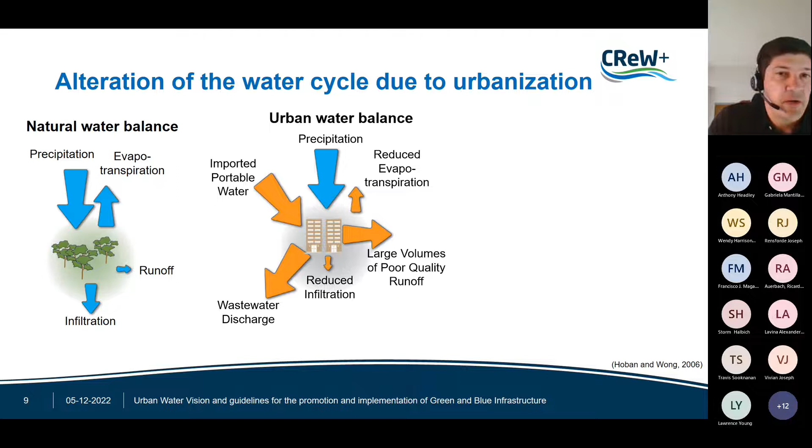The soil sealing leads to reduced infiltration, but at the same time, due to all these changes, we will have a generation of wastewater. So we have wastewater discharge. In many cases, it's still untreated wastewater that enters the environment, or we need to treat it to protect the environment. And we also produce large volumes of surface runoff. When it rains and the surface is sealed, there's no way for the water to infiltrate. It's not retained by plants or water bodies. So we have a problem of large runoff volumes, which often leads to inundation, flooding problems.

Now, the intention of green infrastructure, and this is now the water flow of a water-sensitive city when green infrastructure is implemented, is to come back to water flows at a magnitude of more or less a natural water balance. Of course, we still have artificial water flows, like we still need to import water to cities for different uses. But the idea is to introduce more vegetation, to improve infiltration, to increase evapotranspiration again, but also to look for techniques to reuse wastewater and stormwater so that the runoff and wastewater discharge can be reduced. Interestingly, these changes, the increase of evapotranspiration, are also solving problems like climate regulation in cities.

So with an increased evapotranspiration, we also have a cooling effect for the city that has been lost due to the loss of vegetation. And also biodiversity goals can be introduced. So the water sensitive city has benefits for the water cycle, but it also has additional benefits. They can be ecological benefits related to biodiversity, to safeguard remaining existing ecosystems or those that are impacted by urbanization.

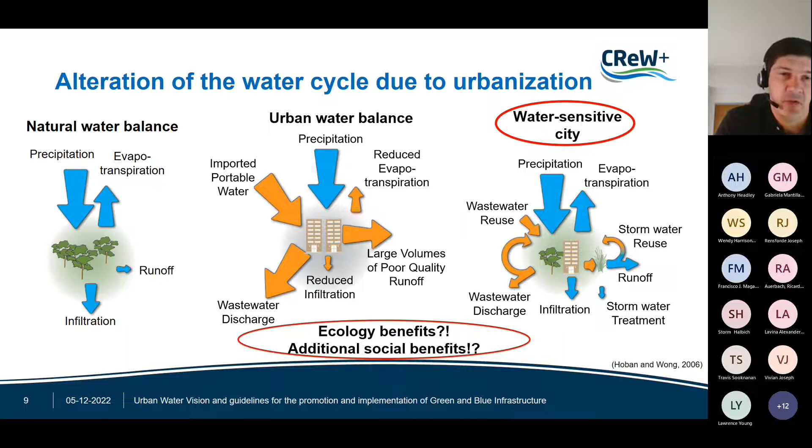But it can also have several additional social benefits. And that's what green infrastructure is actually about. It's not just about improving the water cycle, it's also intended to improve ecological functions and to add social benefits.

So thinking of a water sensitive city that has green infrastructure is meant, as shown in the slide before, to reproduce somehow a natural hydrological cycle, to mitigate the problems of urban runoff in quantity and also the quality problems of urban runoff, to minimize the impact of urban development, but also to maximize the landscape integration and to maximize social and environmental values. So these are the added values of green infrastructure when we design cities in a more water sensitive way.

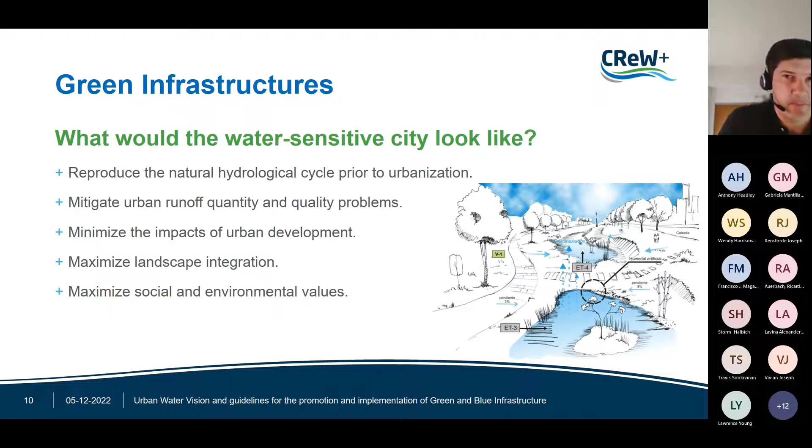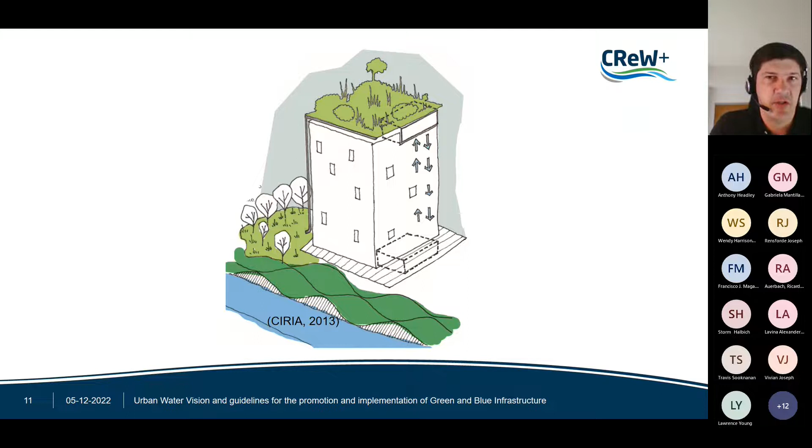Now, the implementation of green infrastructure can take place at different scales. It can start at a building scale, or the building and the surroundings of the building, like is shown here in this image. And we can think of elements like a green roof that is retaining precipitation, so it retains rainwater. It allows vegetation to grow, and it can regulate the temperature of the environment surrounding the building, but also of the building itself. So it can be of benefit to the residents of the building and can bear also biodiversity benefits.

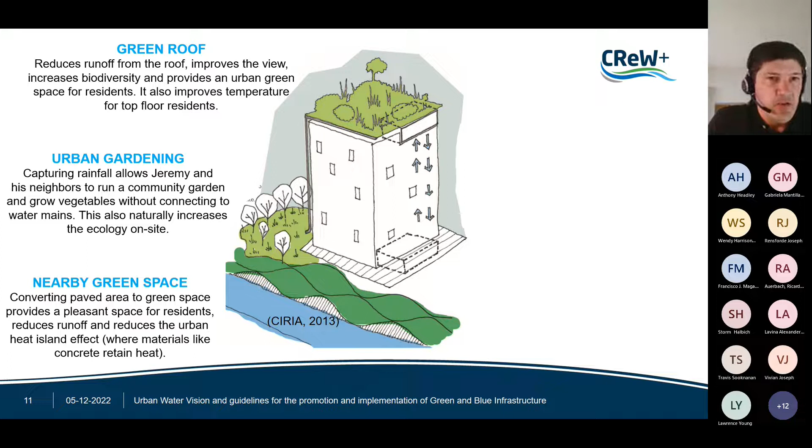There's also a possibility to have urban gardening, could be even on the roof, in a green roof, but often also surroundings of buildings or spaces considered during the planning phase can serve for urban gardening and to produce food and support the food supply of residents. Also other spaces in the surrounding of buildings, when you think of areas for transit of people or just to recreate, can be designed in an environmentally friendly way as green spaces and not necessarily need to be paved always. So this can also have social and ecological benefits.

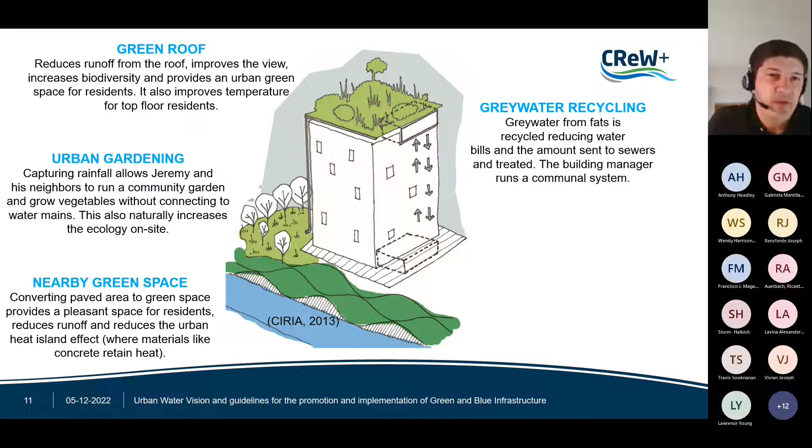Within the building and the building surroundings, water that is used can also be reused and recycled. Specifically, gray water is the easiest used water to recycle. Gray water refers to the water that comes from the kitchen sinks, from showers, from the washing machine, and that can be treated with low technology requirements and can be reused inside the building or for watering an urban garden or recreational green spaces.

And also thinking of the building and where it's located, here you can see a building that is next to a river. It can be, and this is the idea of landscape integration, integrated in the dynamics of a natural landscape. If there's the river and, for example, flooding is an issue, there's also a means, and this may be more advanced and sophisticated, to integrate or adapt buildings or spaces around the building to be flooded at certain times without causing damage. So by design, allow dynamics of natural environments in the surroundings.

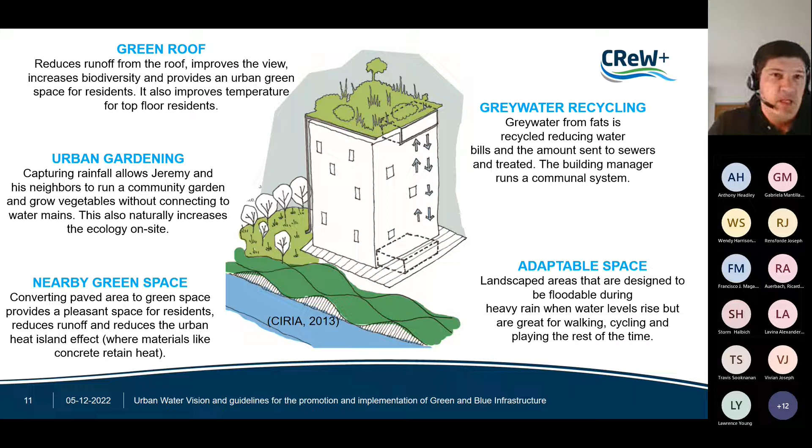So that's a quite useful web page that you can find when you look for green infrastructure EPA. You will definitely find it. It has a lot of information, also cost-benefit analysis and guidelines. It's for the United States context, but I believe it's quite useful also for your context. So these are some examples.

Now here again comes a short question for you: what kind of examples of green infrastructure do you know of in your area of work? Do you have experiences with green infrastructure? What kind of green infrastructures have been implemented in your working context that you know of? So it's not about having heard that green roofs exist, but really what examples have been implemented in your area of work that you know of. So again, you can type in your answers.

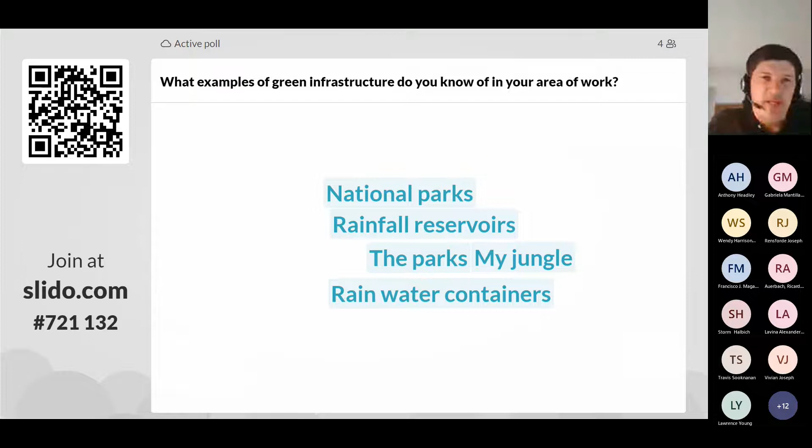Parks, national parks, yes. I have not, and on purpose, I did not give a definition yet for green infrastructure, so you're not influenced by any provided definition, but you already mentioned some important elements when you mention national parks or the jungle. That means, I assume, green spaces, green elements, which have maybe not been developed in the first place as a green infrastructure, but which form part of a green infrastructure.

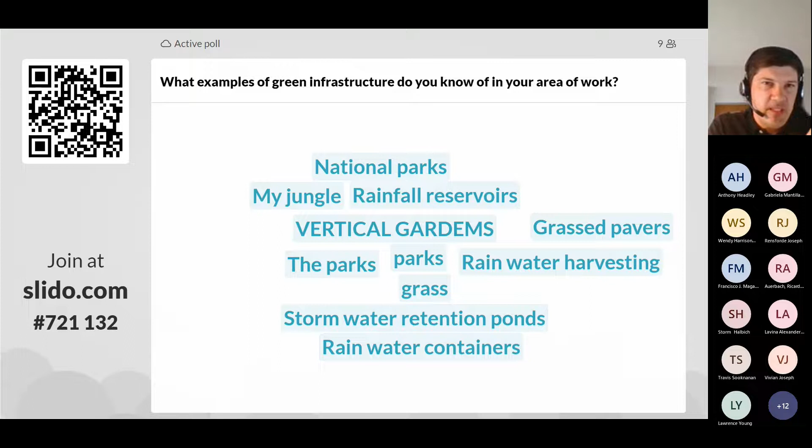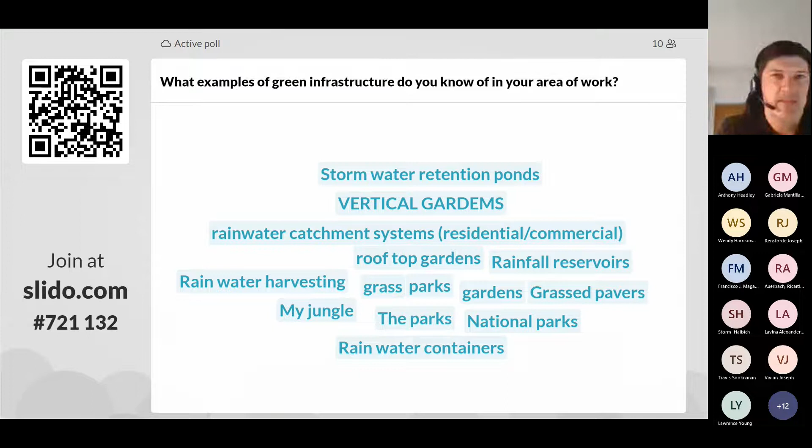So important elements. Grass pavers, yes. Rainwater harvesting. Yeah. So those are similar: the rainfall reservoirs, rainwater harvesting, stormwater retention ponds. So maybe different sizes, household level or building level rainwater harvesting. Stormwater retention ponds are often collecting surface runoff from a larger area. Vertical gardens, yeah, like living walls, green walls. Permeable pavers, yes.

Hello, good morning. Yes. Yep, yes. Sorry, let me turn off the speaker. Okay, was there something that you wanted to mention? You're also allowed to speak up. You're not that many people that it will end up in a mess, so you're free to talk as well.

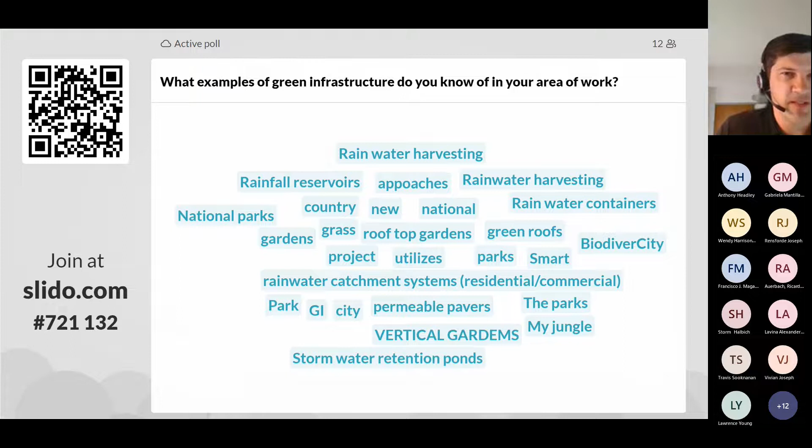Okay, rooftop gardens, like urban farming, I understand. Great. Good. Yes, thank you. That's quite a lot. I'm really encouraged to see so many green infrastructures that you know from your working context. That's great. Okay, let's continue.

Now here is a definition. That's one definition; there are several definitions. This is, I would say, more a European definition. I've shown the webpage of the EPA in the United States. In the United States, green infrastructure is very much related to stormwater management issues. That's maybe the most important connection of green infrastructure. In Europe, in other parts of the world, green infrastructure is often thought

beyond stormwater management. So here's a definition from the Ecologic Institute, based in Germany, that defines green infrastructure as a network of natural and semi-natural areas, features and green spaces in rural and urban, terrestrial, freshwater, coastal and marine areas. So first, it is a network. That's very important. Then it is composed of natural and semi-natural areas and green spaces, both in urban and rural areas, and of any kind of ecosystem, be it terrestrial, freshwater, coastal, marine areas; all can form part of a green infrastructure.

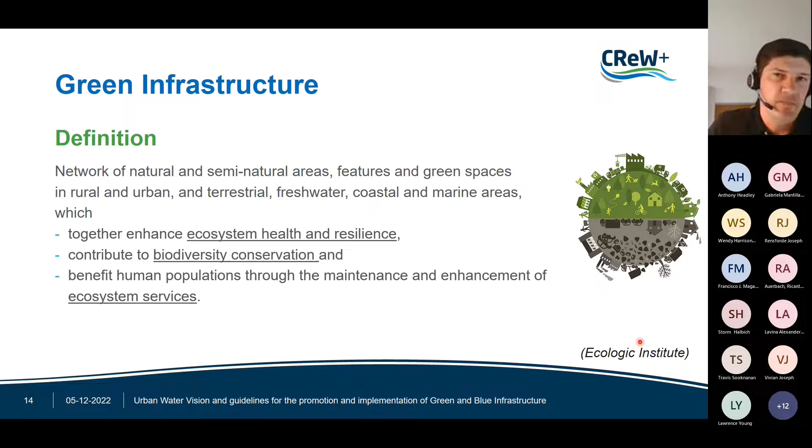That, of course, is difficult to achieve in an urban context, because in an urban context we heavily modify the landscape, and ecosystem health, resilience and biodiversity protection are not the main objectives of building a city. But still, green infrastructure has become an important concept in the urban context as well. And the second part of the definition is more about how it should be achieved, and that's through strengthening a strategic and coordinated approach: an initiative that focuses on maintaining, restoring, improving, connecting existing areas and features, as well as creating new areas and features.

So we should think of the green infrastructure in urban areas really as the network, the same idea of networked natural and semi-natural areas, what is already there. Hopefully in a given city we have green spaces, and maybe some more natural ones, like an urban forest, or in coastal areas even mangroves. And we also have built green spaces like parks or sidewalk and street greenery. All these elements should be thought of in a strategic and coordinated manner to really create this network, because in the network function, it provides many more services than just an individual tree or a single park.

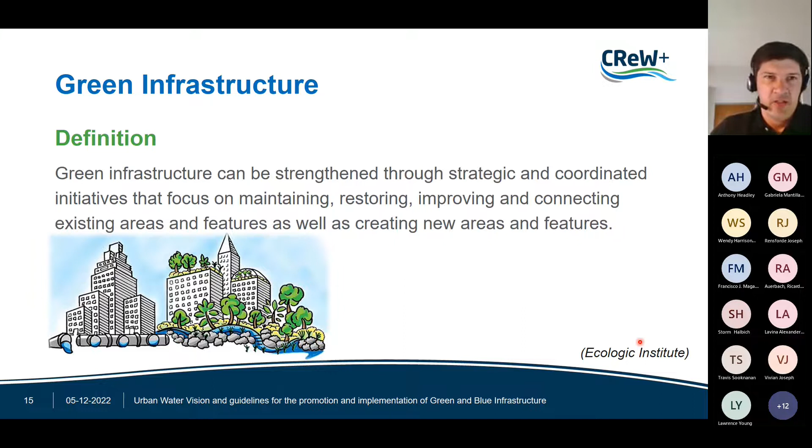So I've shown the image of the green infrastructure at the building scale. Now this is an image that shows green infrastructure thought more at the city, or at least a city sector scale. So you see the different elements of green roofs on some buildings. You see some roadside greenery. You see the river with riparian areas and some green features.

Now, thinking of a larger area allows to think of more functions. So not just functions related to the building itself, the use of water, for example, or use of green space surrounding the building, on top of the building, or at the sides of the building. Here now it's about really thinking at a larger scale. And one important element is to deal with the runoff, to think of how to connect areas, because usually a green roof will not control all the runoff. And also we have a lot of paved areas.

So we need to deal with the topic of capturing runoff wherever it's possible, to reduce the pressure on the drainage infrastructure, and also reduce the flood risk associated. So this is a strategic task, not just thinking of the engineered structure of conveying stormwater, but also think of green infrastructure elements that can help to do this job.

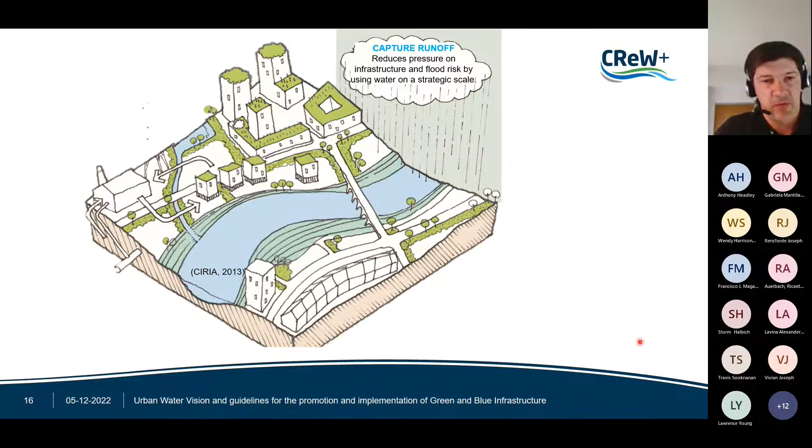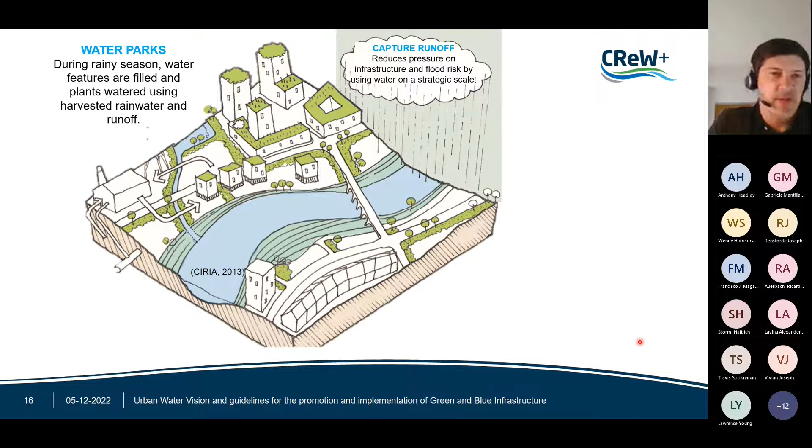This can also be done by creating something like water parks, so water bodies in the city storing water during the rainy season, so that the water can be used in the dry season, to water plants, to be used for different purposes. An often integrated example is to use these water parks also to provide water for fire protection in cities, which is often required, and try to create them as water parks at best with social and ecological functions. So with an ecologically sound design and integrated in social recreational spaces.

Elements like rivers or lakes, water spaces in the city, larger natural areas can also be adapted in the city. So the city can adapt to these spaces. So, like at the building scale, have a more dynamic use of the space, so that flooding of areas can be allowed. At low flow times, areas become areas for recreation, and at high flow times, they're flooded and provide storage space for river runoff.

Also, some areas may be designed, as shown for the example of the building, to be flooded. So that also creates additional storage space to confront flooding issues, and to reuse. So that requires the design of this area for these specific times when they are flooded.

Also, the green grid is an element that connects green spaces, that is really thought of as connectivity to provide ways for wildlife and also for people, like the walkability that I mentioned in cities. And also you can think of routes, because stormwater control is an issue: areas where water is routed when it comes to flooding, so there's excess water, but the areas are designed for this purpose as well.

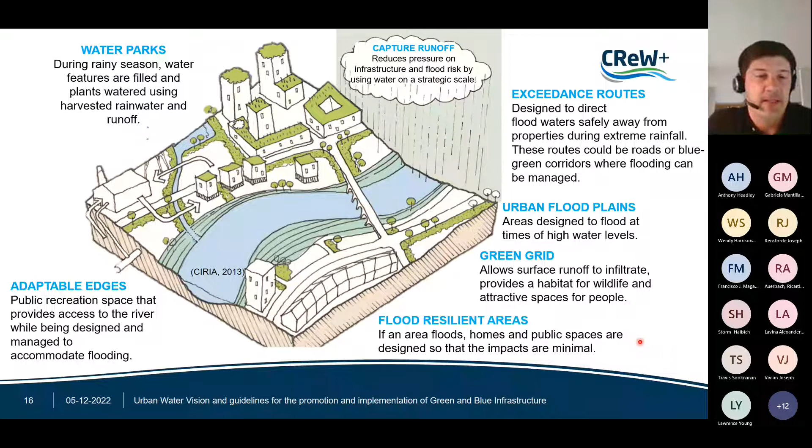Now I have here a few key characteristics of green infrastructure that may have popped up already. One is the importance of a critical mass. This comes from the network character. So there needs to be a critical mass to really achieve the functioning of a green infrastructure, or a certain degree of connectivity. So it means we are not talking about a tree. A tree is not a green infrastructure, but it has to have some kind of connectivity. That's one key characteristic.

The other one is the benefits to people. So this is already in the definition. It has to contribute to the delivery of ecosystem services. And as said in the definition, we are dealing with an ecological function and also a social function. So then by definition, the key characteristic of green infrastructure is multifunctionality. And this is even more true in urban areas. So it has to serve several functions, at least for people and nature, it has to serve a purpose.

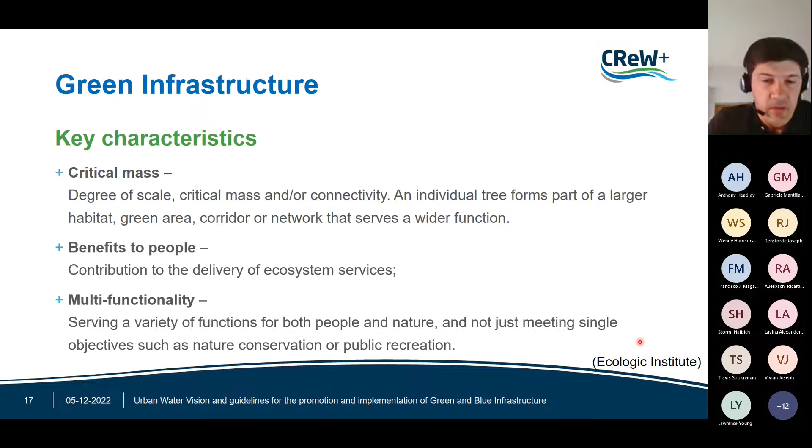So that's then about dealing with infrastructure that is not single objective, but multi-objective, thinking of nature conservation, public recreation, or other social functions at the time. And another interesting characteristic, because it is an idea of a network and strategically planned, coordinated infrastructure citywide, is that it tends to increase green solutions, green areas in an urban area.

It needs to have a substitutability with gray infrastructure. So it should be able to replace functions of man-made or gray infrastructure. For example, to have more nature-based solutions for flood defense, for water treatment, for pollution control, or as recreational infrastructure. So that is also a key characteristic, to think of how solutions can be more nature-based in the end. The coordinated interventions were mentioned in the definition as well. So that's part of the strategic approach.

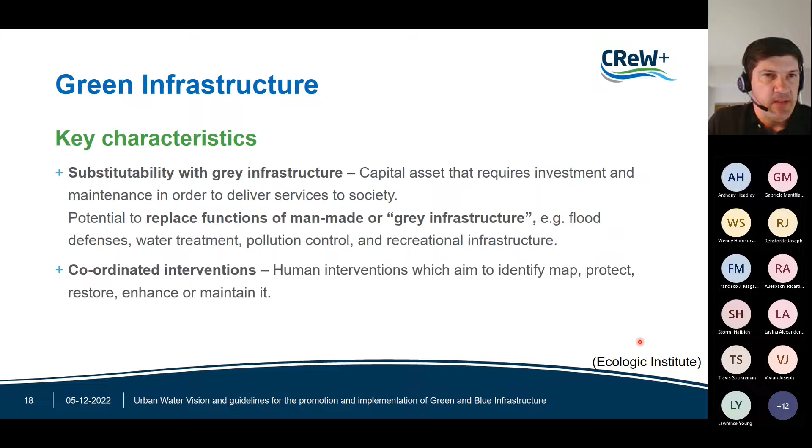Now, related to the multifunctionality, here are some functional areas. So one domain, I believe this has become clear, is water quality, water supply, functioning to purify water, to regulate water. Another functional domain is climate change adaptation and mitigation. So enhancing natural flood management, coastal protection, for example, microclimate regulation through green roofs, biodiversity conservation, an important aspect, and soil protection as well.

And finally, of course, human health, quality of life, and well-being. So functioning as recreational areas or improving functions that are important for human health in cities.

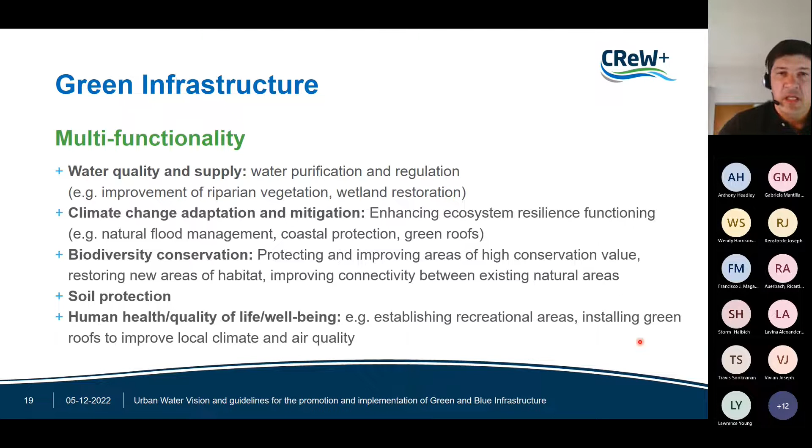Now here on the next slide is another question to you. What is your opinion from the place where you're at? What natural, semi-natural, or built elements could be part of an urban green infrastructure? What could you imagine when thinking of your surroundings? If you have a window, you can look out the window and think of what you see, what could be natural, semi-natural, built elements that could form part of this urban green infrastructure network.

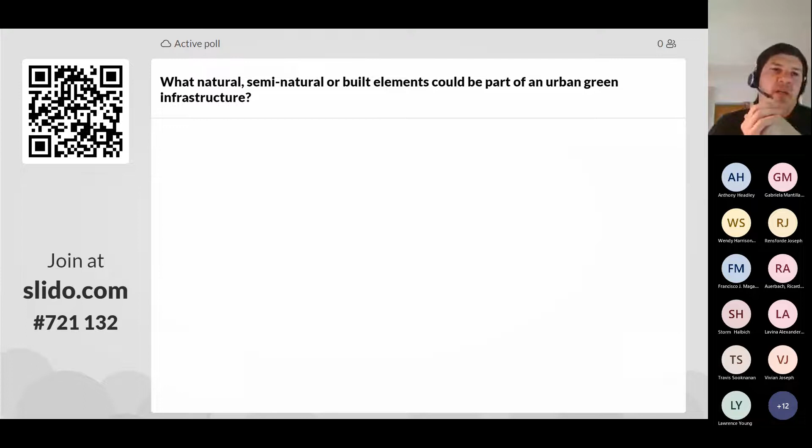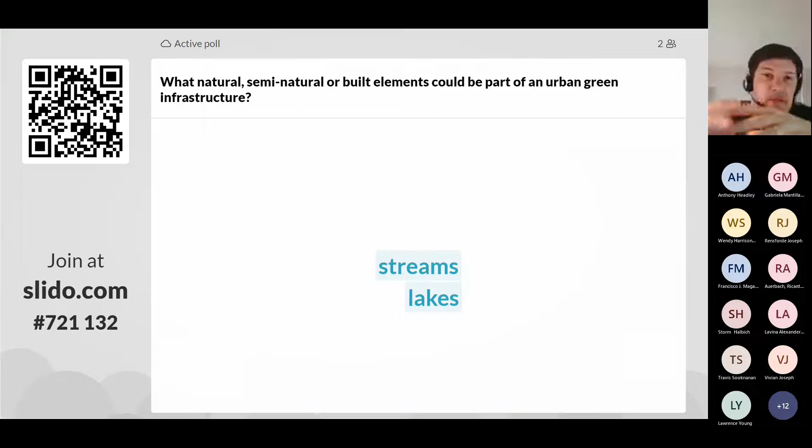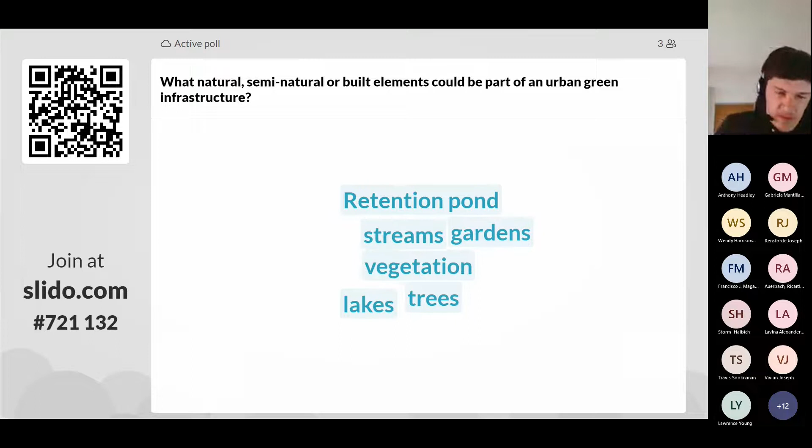There may be singular pieces, parts of it, but thinking of the idea to plan, to coordinate, and maybe additional green spaces are added, and then together they become a network. So here again, to collect some ideas, what is out there in the city that could be a part of a green infrastructure. Okay, you have some ideas.

Yeah, different natural elements, constructed elements like constructed wetlands, gardens. You mentioned streams. Yes, maybe sidewalks. Probably you've heard of linear parks. So this expresses already the corridor function. So streams, for example, are very important corridor elements for biodiversity. They can also fulfill a very good social connectivity function.

So you have singular elements, but also we have some connectors, like corridor elements, that are important. And you mentioned, that's true, more built elements, like permeable pavement. With permeable pavement, there's often a discussion how nature-based this solution is. It could be without any vegetation, so really just a

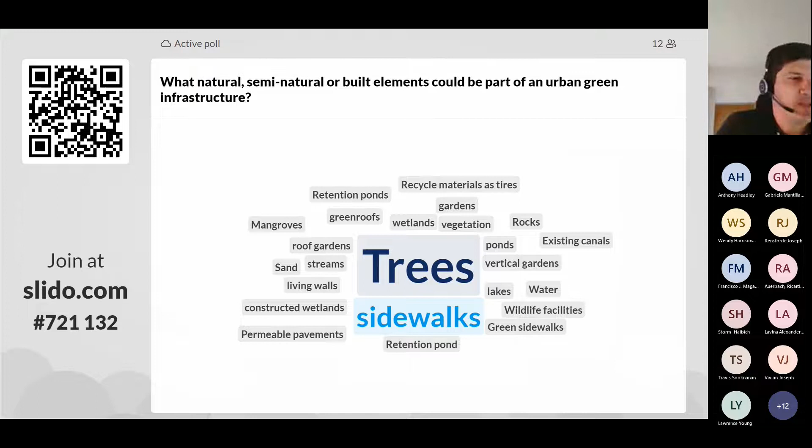porous pavement. It might not be in situ an ecological solution, but through facilitating infiltration, it can have its ecological function in an implicit manner. So it is reducing surface runoff, it is increasing groundwater recharge. So it's not a direct, but an indirect impact. So it's fair enough to think also of these solutions.

That's usually done when there's an idea of urban green infrastructure, that it includes also such built solutions, or rainwater harvesting. So a rainwater barrel has nothing green, but it has an ecological function, of course, with the impact that it has. But it's important to also think of actually green solutions, involving vegetation, like building elements,

the green walls, vertical gardens, green roofs, streetway greeneries. All these elements are very important, of course, because they provide direct biodiversity benefits by providing pollination services, for example, that support biodiversity, be a habitat or food source.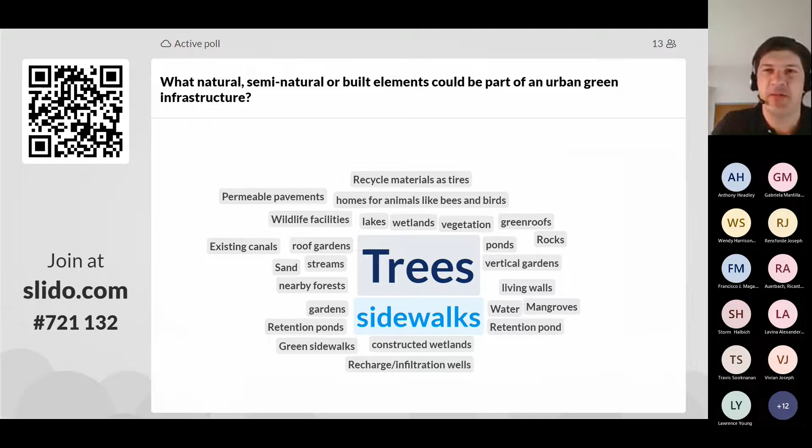Okay, let's continue. I have to look at the time. Okay, we have a little bit more than an hour. We come to the second part. The second part is about the experimental implementation of green infrastructure prototypes. So I hope this is of particular interest to you.

And the research group is now based in Hanover, Germany. My working place is there, where I'm a professor at the university. And the research is carried out in Costa Rica. So it sounds strange at first, but the whole research team is made of people from Latin America, researchers from Latin America that are gaining their PhD at the German university, but doing all the research over 5 years in Costa Rica, where we do field trips.

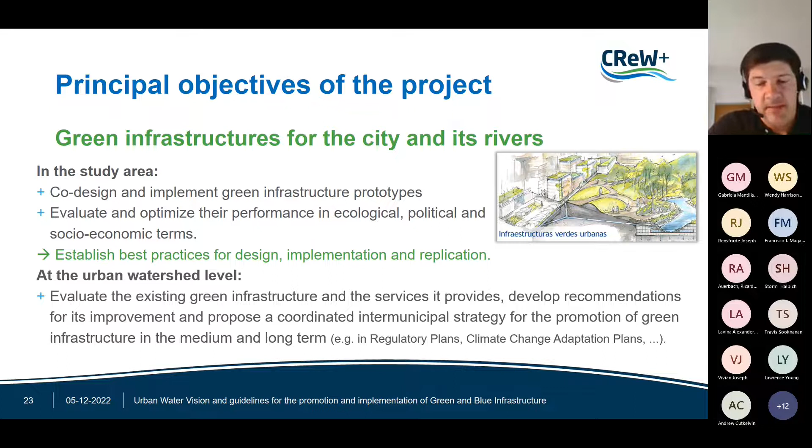When we started in Costa Rica, we had identified one urban watershed in the metropolitan area of Costa Rica, in the region of the capital, that has several issues with flooding and contamination of water bodies. And we started with local partners, the local university, a process to identify the study area where we would implement the prototypes of green infrastructure. So the first step was what we call a participatory selection of the study area.

So the watershed that we identified is shared by 6 municipalities. And this was one of the initial meetings that we had with representatives of the municipalities, who were introduced to the idea of green infrastructure. We exchanged ideas about what green infrastructure is in the Costa Rican context and what this is about.

We explained the objectives of the project and that we would implement, with funding from Germany, green infrastructure elements as prototypes in an experimental manner, and that we wanted to investigate the hurdles of implementation of green infrastructure and see how it performs.

So we asked the municipalities to provide proposals from their administrative areas that are within the watershed, with ideas of what kind of green infrastructure could be experimentally implemented. So we provided a form for them to fill out. So all municipalities had the same form.

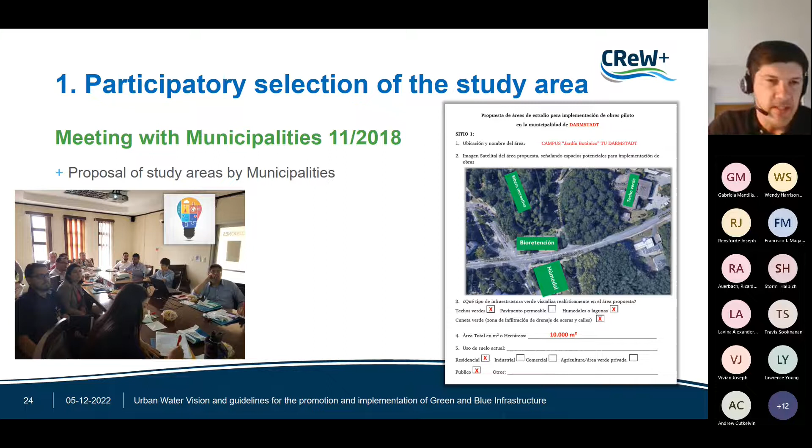They presented a satellite image indicating the area with opportunity to draw in it, and then several questions regarding the idea they had, what kind of green infrastructure elements they would like to implement, how the neighborhood looks, what are the main problems, maybe how is the social structure, social organization of the neighborhood, whether there are other initiatives, for example, and what is the green infrastructure that is existing in this place.

So we received several proposals for different areas with specific ideas, proposals for a study area and experimental sites to implement green infrastructure. This was really thought as an entry point. It was not the idea that they would design and finalize a design. It was really to think and to brainstorm where they could imagine that green infrastructure could work and could contribute to social and ecological benefits of a specific area within their administration.

So this, you see the watershed. That's more or less a small watershed, only 23 square kilometers. Here is, let's say, the capital, San Jose, and here's the airport of San Jose. So when you come from the airport, you are crossing this area. Here's the central highway crossing the urban watershed that goes to the city of San Jose. So that's more or less 10 or 15 kilometers from the city center of San Jose, the capital of Costa Rica, away from this study area.

So as a result, we identified here this study area, this neighborhood. Here's an image of it, where we started to work, to do intensive field work, to investigate and to prepare the implementation of prototypes. This process was very important because it assured us the support of the municipalities with the proposals. We knew more or less about their motivations, their intentions. The probability of their support was much increased by this proposal from their side. And that was really important to us.

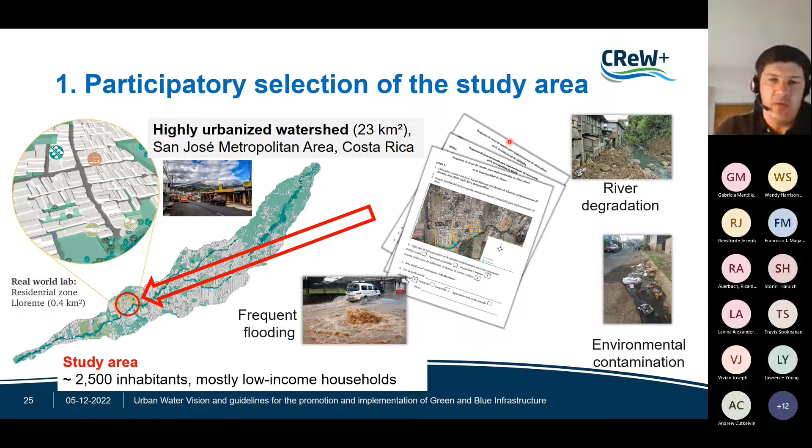So here we were only able to work in one area during this project to do this detailed work, but the whole watershed was, let's say, the secondary spatial scale to analyze the green infrastructure of the whole watershed, and also the replication of measures and the impact of the replication of the measures for the whole area. So that was the first step.

In the second step, we started, and this is an image of the area that was selected as a study area. You see this right next to the river. And we started a co-design process of green infrastructure prototype development. So although the municipality had some idea in mind of what kind of green infrastructure could be implemented in that area, we wanted to involve the residents, the people that work and live in this area, in the design process. So we started for almost 2 years an intensive exchange with different stakeholders in the area to come up with the kind of green infrastructure that should be prototyped, and also the placement of where it should be implemented.

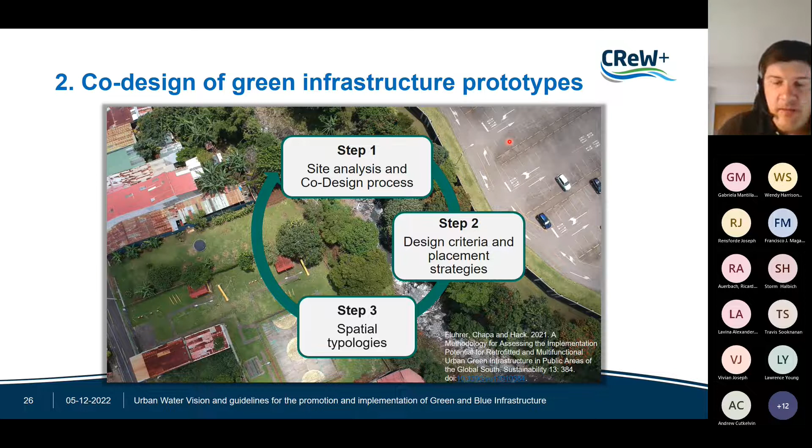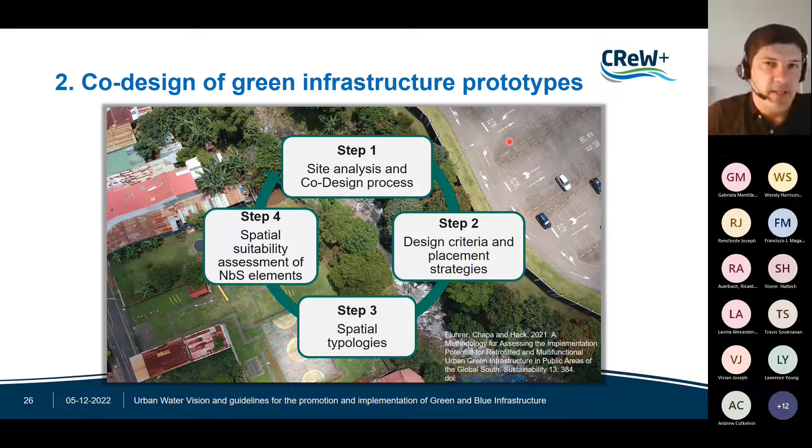So the first step, and I will explain in the next slides, was the site analysis and the co-design process as initial step. The second one was to establish design criteria and develop placement strategies in the area. The third one was to develop spatial typologies, specific units that are repeated in the area that define different typologies, so different suitabilities for certain green infrastructure elements. And the fourth step was the spatial suitability assessment for nature-based solutions, so green infrastructure elements. So I will go through these steps with some examples. So the first step, the site analysis and the co-design process. This is just an extract of the whole step.

So as examples, the process of active involvement of different stakeholders. So we had different activities. The first step, let's say the easiest step, was to enter an exchange with the organized parts of the society. So there's a community organization, let's say, that is made up of representatives of the residents without political colors. That was the first step where we could enter and connect.

Then we organized street markets, we organized workshops where we invited people. We did interviews with residents. We also had exhibitions which had more an educational purpose, and also to showcase different ecosystem green infrastructure prototypes. And we also worked with the social sciences group of a university with students in the area doing social research.

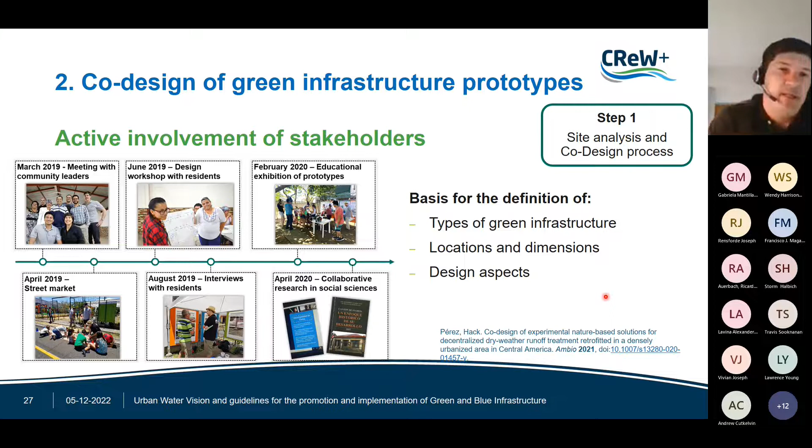So very different means to end up with a high degree of interaction with the residents and to in the end find what type of green infrastructures are suitable, appropriate regarding the demand of the residents and the stakeholders, what are possible suitable locations and dimensions, so geometries, and what kind of design aspects revealed from this. So in this process, here an example of the interviews.

For example, we did an intensive surveying in the area where we just had a short questionnaire of 5 questions that related to the perceptions of the people regarding green spaces in the area, increasing green spaces and reducing the space for cars, and options to treat grey water in front of houses by plant-based solutions. And the last question was about the willingness to pay.

So I just showed 2 questions and the answers to the 2 questions. So one question, and you see the map of the study area. So all properties, like the little boxes, and those that were surveyed are either green or red. Those residents who were interviewed and said yes to more green areas are shown in green, and those who said no are shown in red.

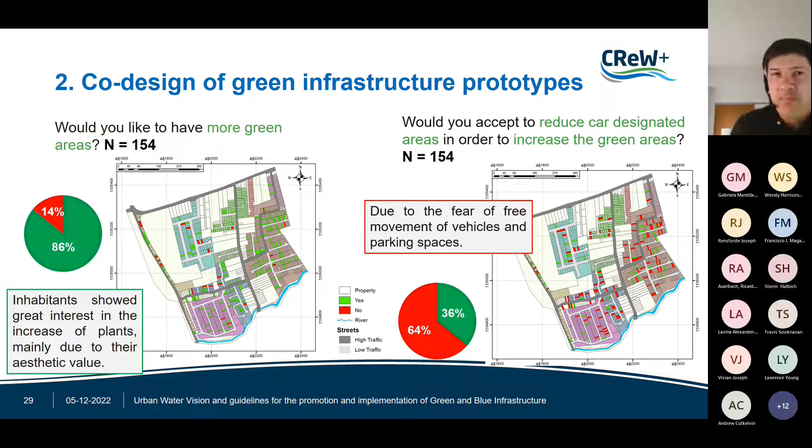Of course, a large majority is in favor of more green areas. Also, some said no, there's enough green space, we don't need any more. So that was one step. Another one was then a more challenging question: if the people would be in favor to reduce the car space, so the area that is designated for parking or trafficking cars, in order to increase the green areas.

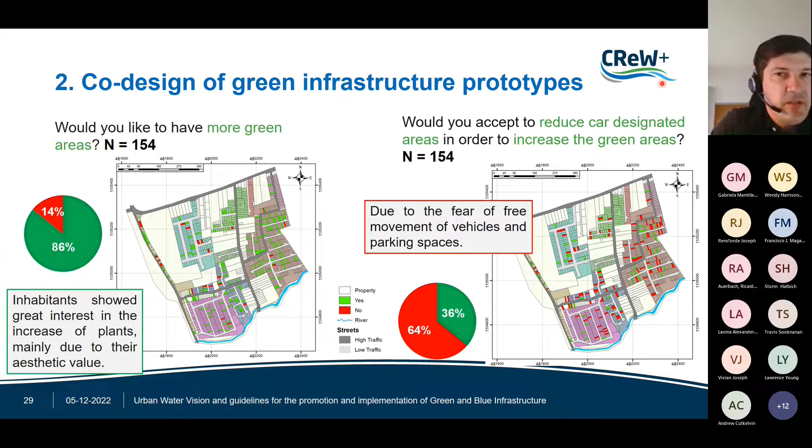And here you see a different picture. So 2/3 of the people were against this. And this was for us a clear signal that at this point, of course this does not have to stay like this, but for our project time, the 5 years, we will probably not be able to turn the streets into green spaces. So that was a clear picture. Although there were some people who were in favor of more green spaces and would wish to reduce the car space, but not the majority.

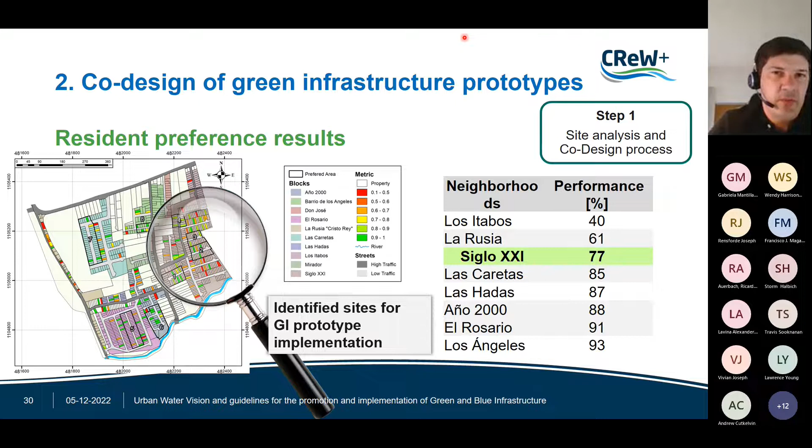So these are two examples, and with all the other questions together, we defined a certain metric that was used to identify the location where most people are in favor of such a green infrastructure solution, where we could most probably implement a green infrastructure prototype. So that was more in this part of the study area where we could identify specific sites for the implementation of green infrastructure prototypes.

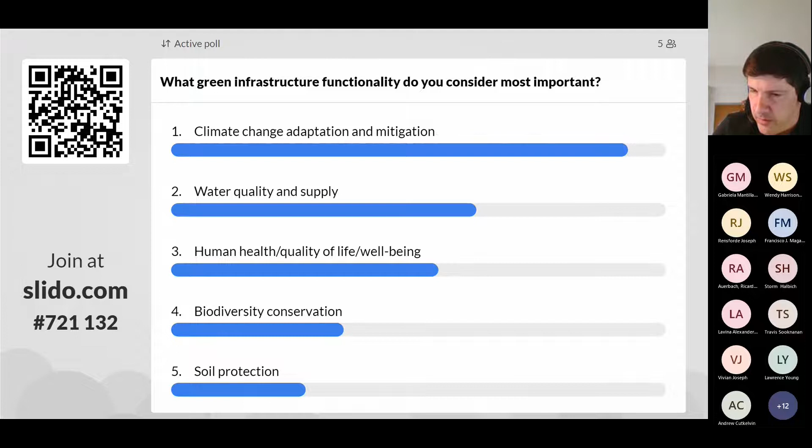It's a kind of a different polling activity. It takes a little bit of time to think about priorities. I think I will also vote. Let me see what I consider more important. Oh, it's difficult. I would also rank several at first priority. But we have to choose. We have to make a choice. That's life. Okay. I voted. Yeah, climate change, adaptation, and mitigation. It's now in front.

Maybe some functionality is something cross-cutting, like a transversal issue that by choosing it as priority, it will also fulfill other functions. Of course, they are highly interrelated, these functions. Climate change, adaptation, and mitigation comes with human well-being and health. So, but not necessarily. It doesn't mean that any human health function, well-being function is also a climate change, adaptation, or mitigation function.

Yes, great, 16 people. That looks good. In front is the climate change, but closely followed by water quality and supply. I hope I haven't influenced you too much because I'm talking so much about water. Great, that's good. That tells me that you have not fallen asleep, that you are still active. Great, good voting. We have to continue, but that's a nice picture to see what you consider as most important.

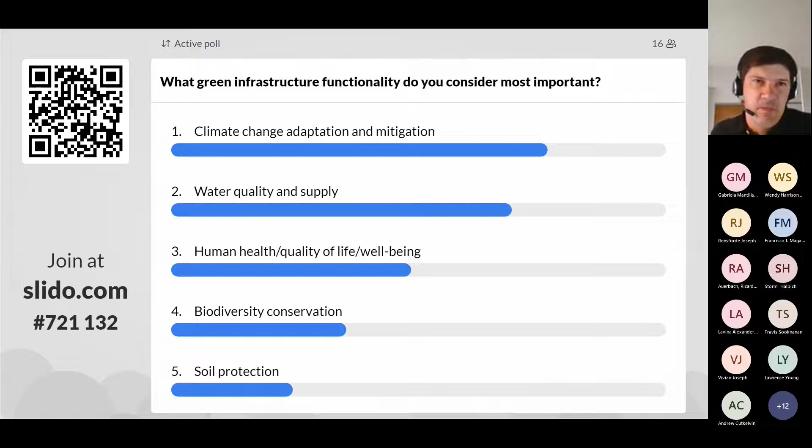And that was with the Spanish module, the same case on Tuesday. I did the same polling. Soil protection was the last point. Now, of course, it is probably not the main priority in urban areas. Okay. Now the third step, that was a short break. So we came from the multifunctionality criteria and indicators for multifunctionality and some placement strategies. Now this is related, this is the spatial typology. So here for an example for a road type,

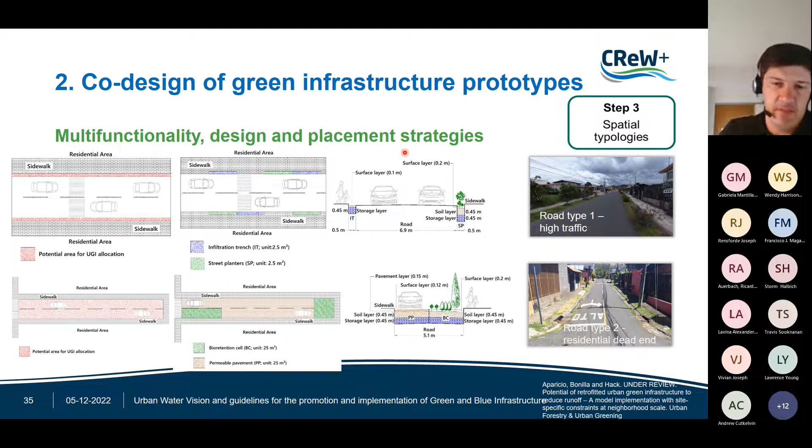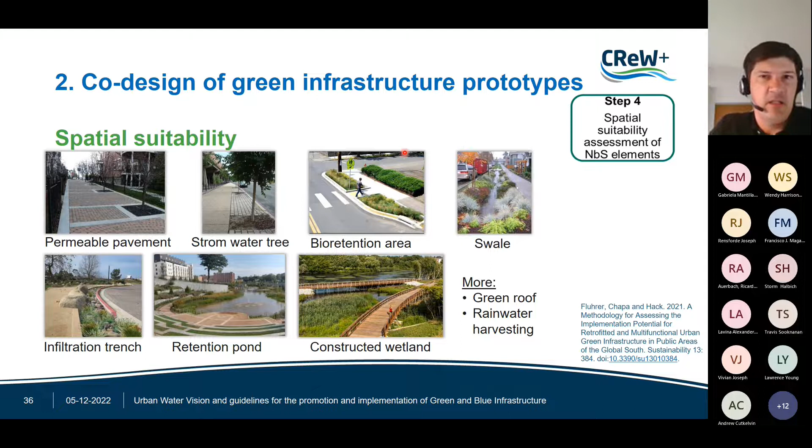So here comes again another question, another task for you. So this is again the same type of poll as the last one. Here it's about the feasibility of different green infrastructure elements. So what do you think is the most feasible one? Again, think of your personal context that you have in mind and do again a prioritization of the different green infrastructure elements. Now there are several ones. Yes, great. Then the first voting coming. Again, you have to select all in an order that you want them and then send. Ah, no, it's 3. I'm sorry. This one you have 3 priorities, so you don't have to select all, but you have to select 3, the most feasible ones for you. Then click on send. You will have your vote.

So now I'm exploiting you a bit for doing my research here with you to see. It's not representative, I'm afraid, this survey, but at least it gives me some input, some ideas from your specialized group.

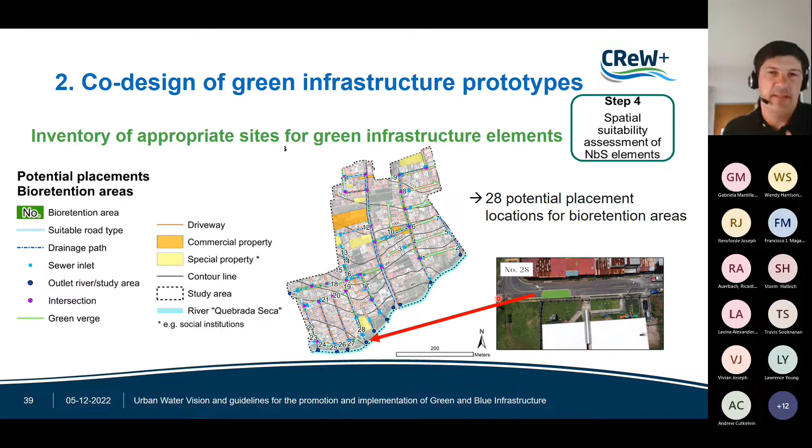So it was possible to implement, let's say, the traffic is that low that you can actually have an obstacle in this road, and cars just would have to wait because it's just one lane when there's a car coming, and after the car has passed the next one can go.

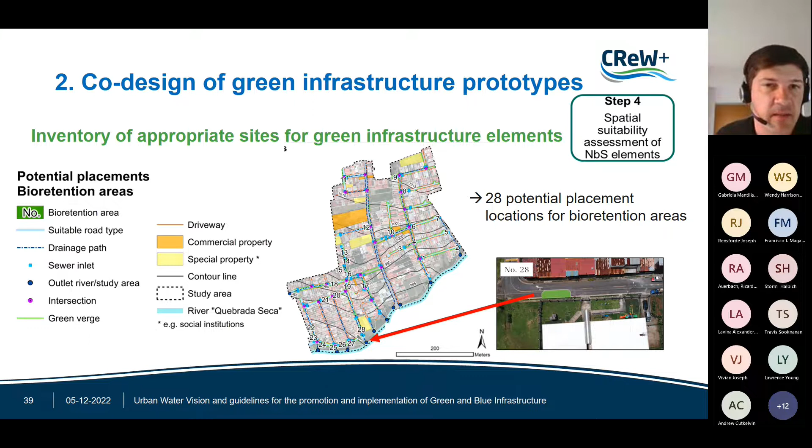But here we also saw ways how we could gain more space. So this is thinking about a mobility transformation, thinking of how the traffic can be rerouted, because in reality all streets are two-way, so the cars are heading in both directions, but it's possible to reduce or at certain points define one-way directions.

So one-way streets like here, or this could even be one way when you say this is to leave this area, here you can enter. This could also be one way when you enter here and you leave here. So there are options to change the way the traffic is routed in the area. This will allow us to gain a lot of space. That's a really important aspect.

We used tactical urbanism. That's a means where you just block a lane of a street temporarily for a certain while to see how the traffic adapts and how you can also try out alternative uses of this space. We used this to simulate how the users of the space would adapt to a new condition. That's an experiment that can be done quite easily for just a short amount of time, and you see how people react and how traffic flows, for example.

And also street design can completely change. So the dead-end roads, which are those here in green, could have a different design.

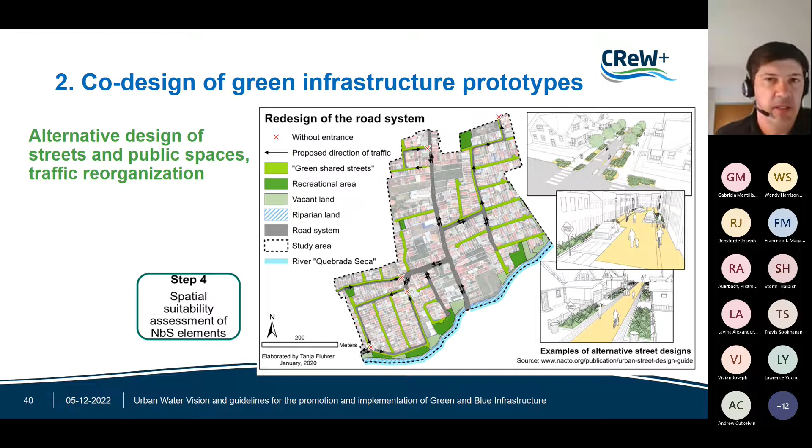Permeable pavement and introducing more green space, green areas would be possible for these areas once you design them as a new road type that actually in the legislation does not exist yet in Costa Rica, but it could be. We call it a playground street in Germany, areas where people have more privileges than cars. Cars have to go very slow. There's little parking space. The area is more a playground for people and not for cars. So that's also another way to gain more space.

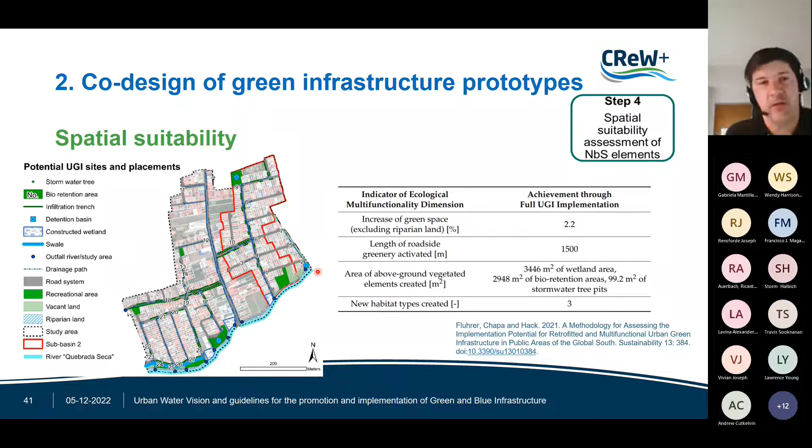But you see, we also assessed the runoff reduction, for example, the runoff control by modeling areas. This red area is one drainage area, so all this area drains here to this point. So we modeled this and could also quantify the surface runoff reduction, so the stormwater runoff control by this green infrastructure network.

Okay, so that was all the way to the definition of locations and types of prototypes, and then we actually implemented the prototype. And here, just to explain a little bit more what we understand as a prototype, it's a pilot scale measure to investigate the impact of green infrastructure on urban water management in a built environment. So on purpose, we worked in an area that was already developed. It was not a new design, but we call it retrofitting of a built environment.

And we considered different design principles that resulted from this co-design process. One was the construction in existing public space. Then do not affect the current use of space, so not reducing street space or walking on the sidewalk, and the intention to add a new function to the space to improve the landscape environmental aspect and the water quality reaching the river.

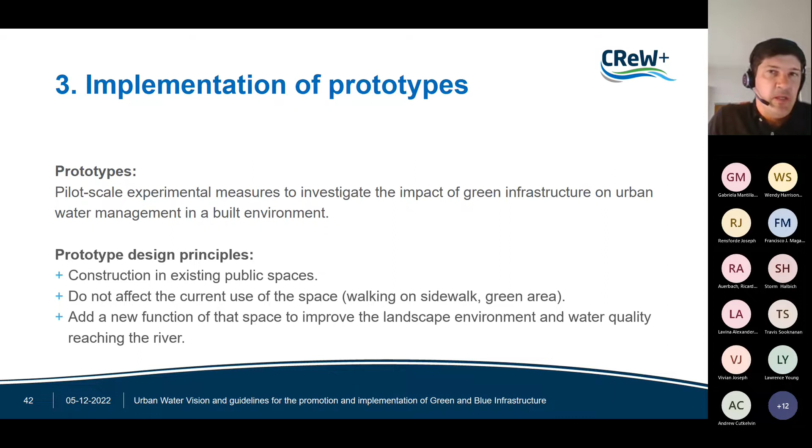So here are the prototypes that we constructed in the beginning of 2020, right before the pandemic hit the world. So we managed to construct these prototypes before we had to stop traveling. We did it at different scales. That was another approach. One was at the household level.

So a household solution to treat the grey water that is actually discharged by all households to the street and that drains to the river without treatment, to treat this water and to have a vegetated space in front of the house, which also has an aesthetic function. And this is a solution in collaboration with the house owner, so it's the responsibility of the house owner. We tried out different solutions, different actor constellations, also to have different instruments that could be incentivized by different political instruments. So this is one where the house owner has the responsibility and cares about it.

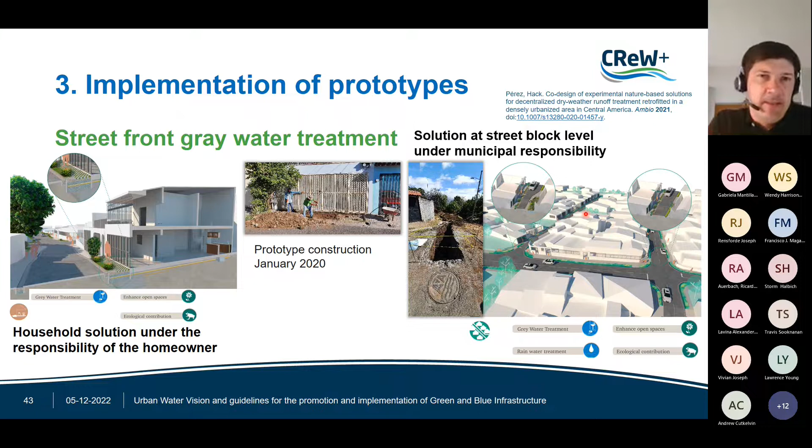We also did a similar solution at the street block level, where we implemented the solution under the responsibility of the municipality, where the house owners did not have to care about it, let's say, just had to review their inlet structures and control screens where sediments or solid materials were collected before the water was discharged. But the infrastructure itself was under responsibility of the municipality.

And then the third scale was in the downstream area, next to the river, where rainwater and grey water treatment was built in a solution that is more like a constructed wetland type, which was of recreational value as integrated in a park, and also of greater ecological value. So these were the three prototypes that were developed that we are still monitoring. Because of the pandemic, we could not advance as we wanted to, but now we are producing the last results to see how the performance of these prototypes actually is.

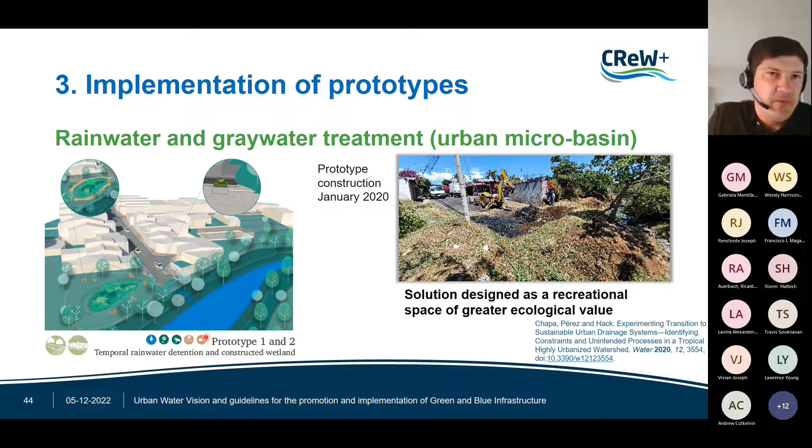Now the last step, and this is what we are also doing at the same time, is the upscaling, to develop a regional planning for upscaling scenarios. So considering all that we have learned, all the experience and knowledge from the study area, how can this be extrapolated to the entire watershed scale?

So based on the criteria, placement strategies, the procedures during the spatial suitability assessment, and also based on the experiences with the implementation of co-designed prototypes, we could identify different sites in the watershed for replication of the different measures, those that were built as prototypes, but also others that were just assessed in the suitability assessment.

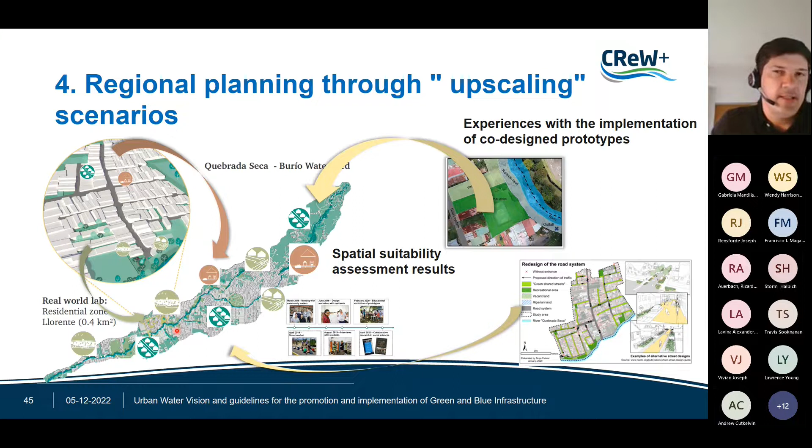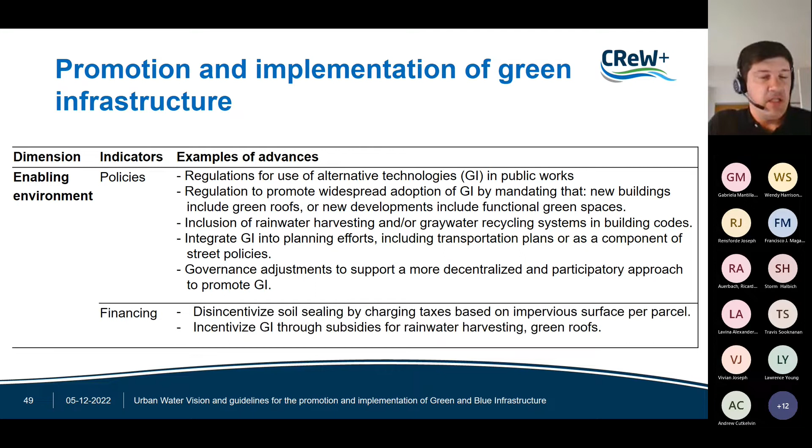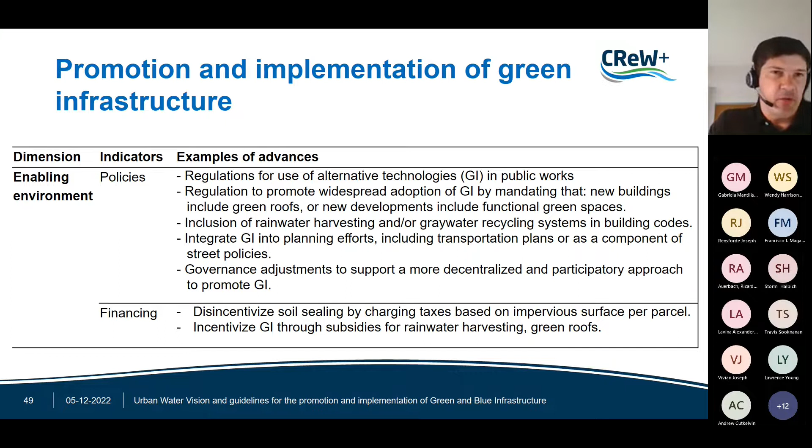Another enabling element that is important is the financing. Different financing can result in the promotion of green infrastructure. For example, soil sealing could be disincentivized by charging taxes for impervious areas per parcel, so the property owner has to pay if a certain soil sealing share is exceeded. Or the other way around, green infrastructure could be incentivized by subsidies for rainwater harvesting or green roofs. So these are elements that are considered enabling environments, that really provide a good environment for green infrastructure adoption.

The institutional dimension is then related to the institutions themselves. They can be defined in policies, in laws. They define capacities. So capacity building is necessary, strengthening of capacities.

We see that with our conventional gray infrastructure, we have a high degree of specialization in single or monofunctional infrastructures. Now, if we think of green infrastructure, maybe a hydraulic engineer will need ecological knowledge or social knowledge on recreational aspects of infrastructure, which is often not the case. It's not given. So we need capacity building, capacity strengthening to have experts that are able to think green infrastructure and to also promote it.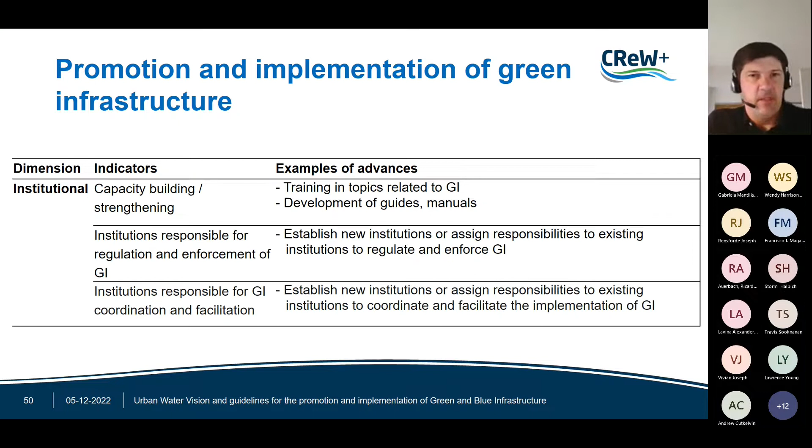Then institutions that are responsible to regulate, to enforce green infrastructure are needed. Institutions that coordinate and facilitate green infrastructure development are needed. And this is the institutional side. So some examples, what could be advances in these areas.

The dimension of management and instruments is the inclusion of green infrastructure in different action management plans and climate change adaptation and mitigation plans, participation plans, so even in water management plans it could be included, so that it becomes a means in the day-to-day work and strategic development.

Now, regarding the implementation and operation, this is the assurance of a certain performance of the green infrastructure. So on the one hand, the engineering system itself, if the functionality works, so is the performance correct? Is the system resilient? Does it work to achieve the ecological functions? Is this economic? All this is regarded to the performance of the engineering system, but also the achievement of the goal of connectivity in ecological and social senses needs to be assessed.

And the social community resilience is related to what are the benefits, social benefits that are associated to green infrastructure that also are relevant, and they need to be assessed. Required for this is also often monitoring and evaluation. So monitoring systems are needed to really assure these different performances in different degrees.

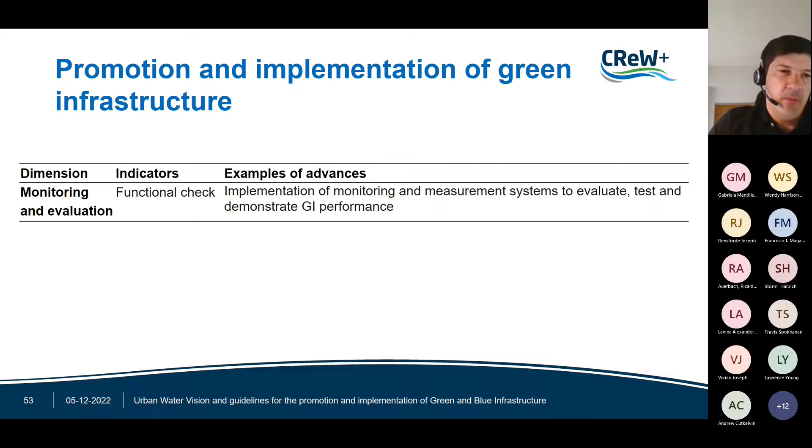Okay, so these were more or less the 5 dimensions that are considered as dimensions for transformative change to achieve advances in the promotion and implementation of green infrastructure. So now here another short activity, another poll regarding another prioritization now for you. What is the dimension of transformation that you consider most important? So the goal is to promote the implementation of green infrastructure. So what is most needed

at this time now? When you think of your professional context, is it an enabling environment? Is it policies and financing that is needed? Are the institutions needed? Capacity building? Is it that we need to implement and operate green infrastructure? Do we need monitoring or management and instruments? So again, here you can now have an order of 5, select all 5 and do a prioritization of the elements.

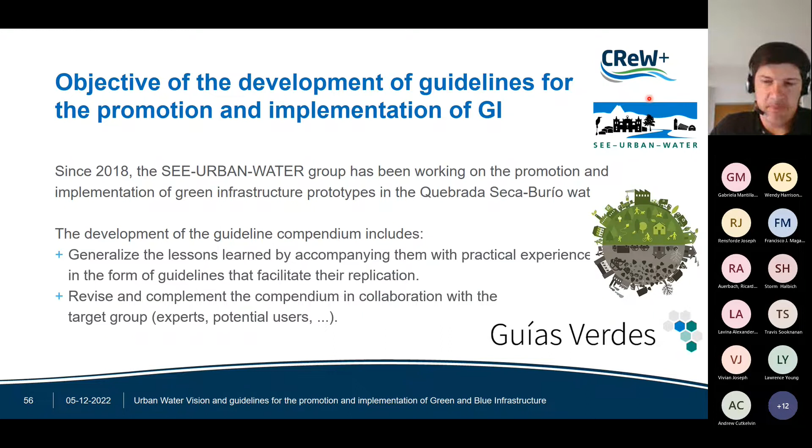So the entire process started last year with the elaboration as kind of a reflection process of the research project, SEE-URBAN-WATER. We had an internal review. In our team, we have people from different disciplines, researchers with different backgrounds. So also to find a common language, we had an internal review, and also to more or less standardize a little bit the different guidelines.

Then we had the external review, the second half of last year with the target group. They also reviewed and improved our guidelines so that they are understandable. We used the workshop and also bilateral meetings to do this. And the last part is then a participatory process. Actually, it was not finished last year. We are still doing it for the next 2-3 months, where we try to develop more guidelines with experiences from other projects beyond our research project.

And the website that is published now also has a comment function, so people can still comment on the different guidelines so that we can continuously improve the quality of the guidelines and add more experiences. And the last step is the dissemination. So with new guidelines that are developed, we'll have several dissemination events where we'll promote the guidelines to let the people know. We're working on social media as well, so that more and more people get aware of this toolbox, and also contribute with their experiences. So the idea is that it can grow.

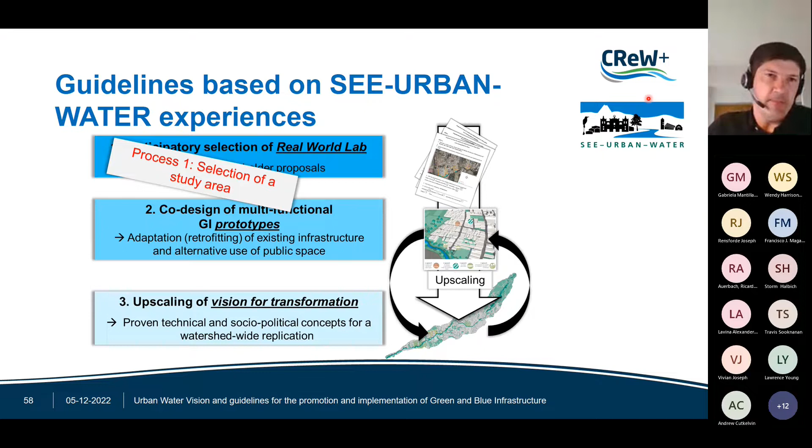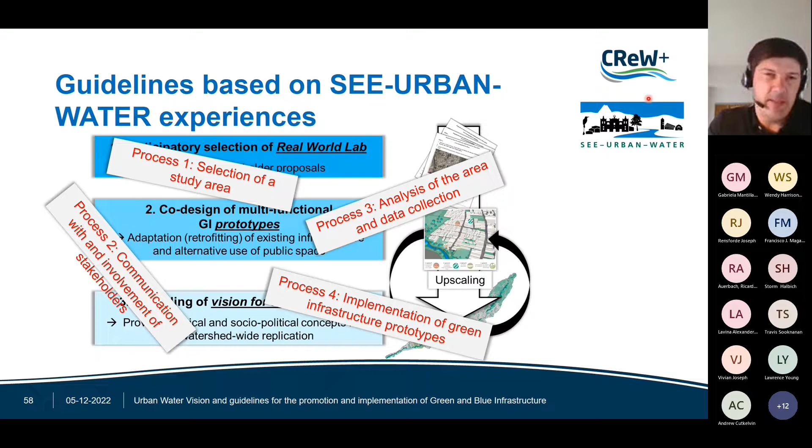The second process is how the communication and involvement of stakeholders can be organized. So this is part of the co-design process. The analysis of the area and data collection for assessment of suitability of sites and placement locations. Indicators are also involved. So this is all part of what I presented as co-design process, and also the implementation of green infrastructure prototypes, what we have learned from our experiences, what has to be taken into account, what the procedure is with the municipality to actually build a green infrastructure in the end. So these are the different processes that I've shown.

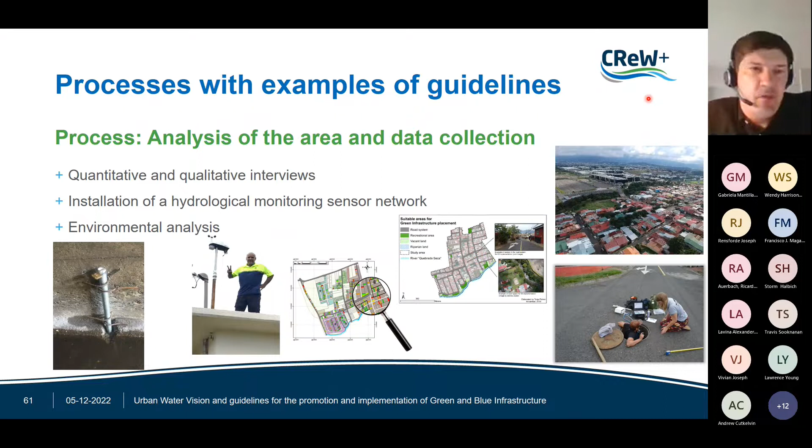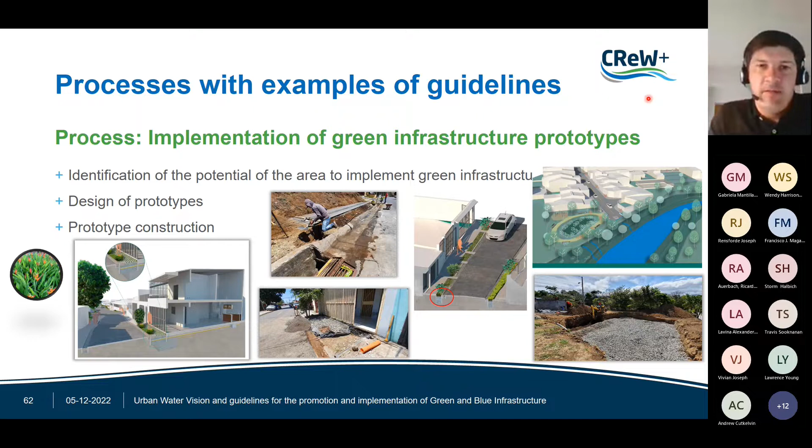Then the analysis of the area, how to carry out qualitative and quantitative interviews and different environmental analyses to assess different performance indicators. Yes, the implementation of the prototypes, like how to approach the design process of prototype building, the prototype construction itself, and the identification of site potential for implementation.

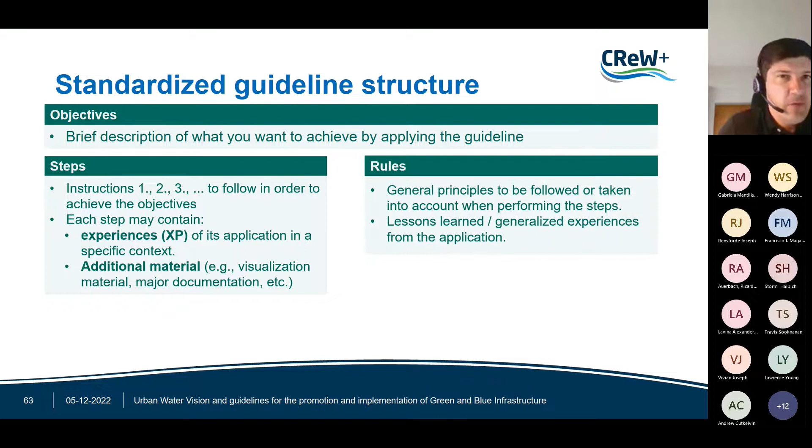So the guideline itself is generalized, so it's not context specific, to be able to be applied to any kind of context, but the experiences show examples of how a certain step was realized in a certain project context. Then we have a section with rules that should be taken into account when carrying out the different steps, and a section of scope and challenges.

So what is actually the scope of one guideline? What can be achieved with this guideline? What are the limitations and challenges to the application of this guideline? So as I said, this is a web page that is growing. So we have the guidelines from our project.

We have now the first guidelines from other project experiences, and we are still working on more. So we are quite open for other initiatives to propose guidelines based on their experiences to include them. So our service is to organize the redaction of these guidelines and to put them on the web page.

So here I want to show you the web page as well. It's in Spanish, but you have the link. Maybe you're not familiar with Spanish. You can use Google Translate. So this is how it works. It's basically very reduced. You have here the guidelines, the different sections. You have a contact area. Here's a general explanation of what this is all about.

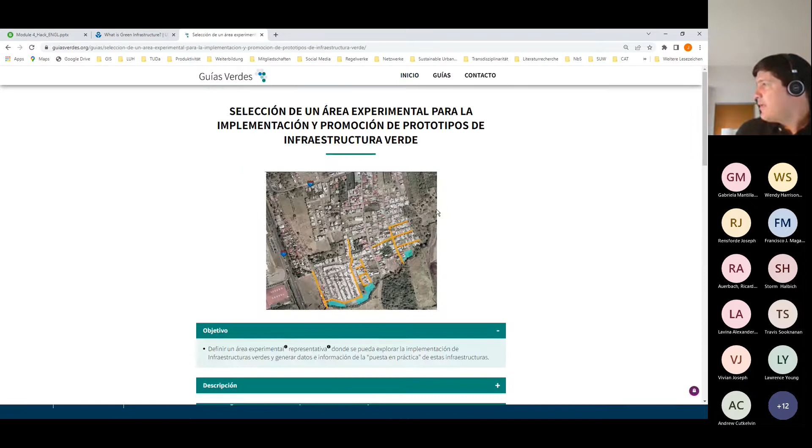Here are also the different processes, so sections for guidelines. Here you can see the individual guides as well. And here some external resources from other projects can be seen. Let's go to one example. Maybe here the selection of an experimental site. This is how a guideline looks. As I said, the standardized structure of objective, short description here, the steps.

So you see different steps, and here, for example, cross links to other guidelines if necessary, or experiences. So you can see here, for example, this is the project meeting that we had with municipalities where we collected proposals, and you can read the minutes of the meeting as well, free. So you get familiar, and also here the format we used to do the site selection. So this was the form that the municipality filled out to propose experimental sites.

So you see how we translated our project experience into a generalized form for others to see if this is helpful, and they can replicate maybe some of this. You see the results section, rules, challenges, scope, and here's the section where you can leave comments. So anyone who reads this guideline and maybe has a question, or something is not clear, or has an idea of what to add can do this with a comment. The comment will not appear immediately. It will just be sent to us, and we can review it and answer it.

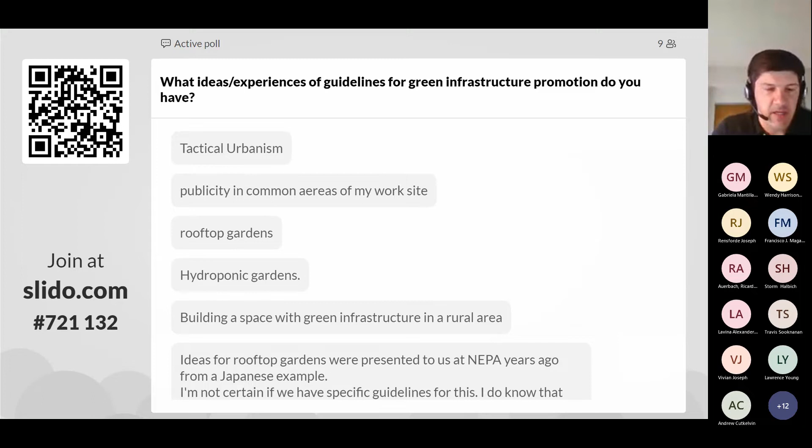But all the fauna, the animals that will be attracted, can of course also be invasive species. So it is an issue, it's something that has to be kept in mind. If there is an issue already with some invasive species, then care should be taken in the design of green infrastructure elements, especially when they are providing habitat functions. I hope that's fair enough as a response.

Another question: were there any public awareness campaigns done to inform on the benefits of green infrastructure in Costa Rica? From our side, yes, we had several events, let's say. We also work closely together with the GIZ, the German Development Cooperation in Costa Rica. It also has a green infrastructure greening the city project, and there were several awareness campaigns. Let's say we did campaigns for a broad audience in the study area, where we did the street markets, for example.

So trying to really reach out to people that usually will not participate in a forum organized by a university, for example, so that we did in the study area. And this year we also participated in a music and cultural event in collaboration with schools also, but with our means on a lower level. I believe it could be done much more broadly, to reach out to people who really maybe need to be reached, who are not already familiar with or in favor of green infrastructure. So there's actually a need to do that.